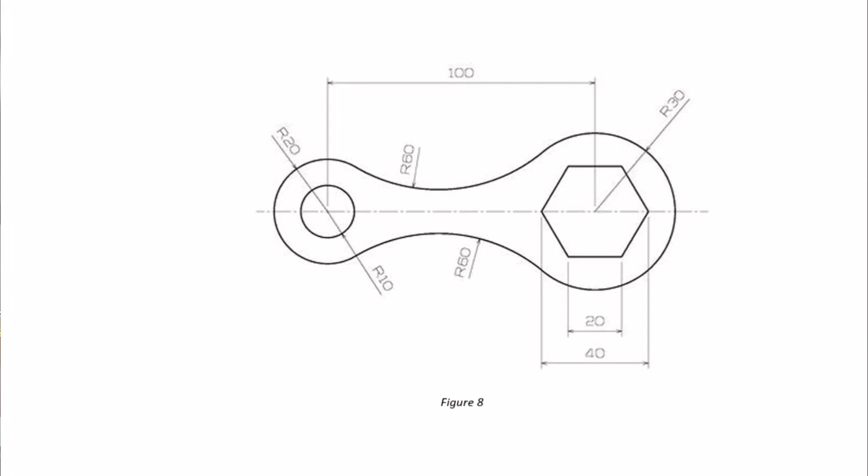Hello guys. So since we have done all the geometric constructions that we said we're going to focus on, well, that will be necessary for our test, I want us to do a couple of exercises, right? With this one being the first one, figure number 8. I chose this one because I can see it's the easiest one to start with.

So to start, I said the first thing that you're supposed to do when you have circles, you're supposed to draw the skeleton, right? I call it the skeleton, but you can call it center lines. Just draw the horizontal one. And then they are saying these two center lines are going to be 100 millimeters away from each other. So you measure 100 there, like that.

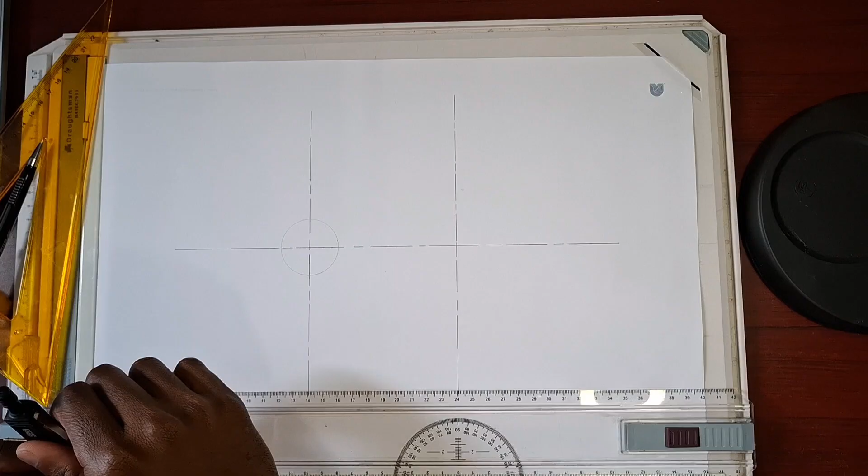Then now I'm going to draw my circles there. The first circle is 20 millimeters radius, the smaller one, right there. I'm just gonna draw it in faint lines, just make a hole there. And then the bigger one is R30, 30 millimeters, like this, also in faint lines. I draw it in faint lines because there is some material there that I'm supposed to erase, because we still need to get those other tangent arcs.

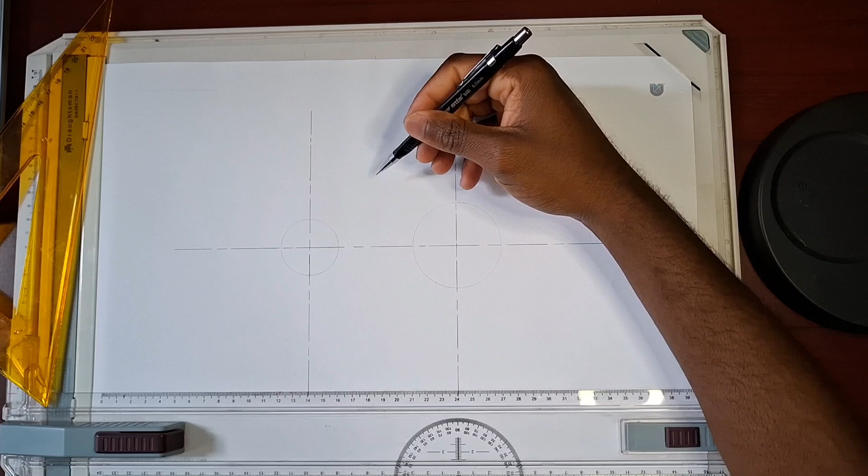As you can see on the question, there are two tangent arcs to those two circles. So we said you are going to use method number 7 on your notes, the first document I gave you, the blue one, to connect those two circles. The goal here should be to locate the center of the arc that is supposed to touch these two circles. If you don't know the position of the center, you have to use a compass to locate it, not a ruler.

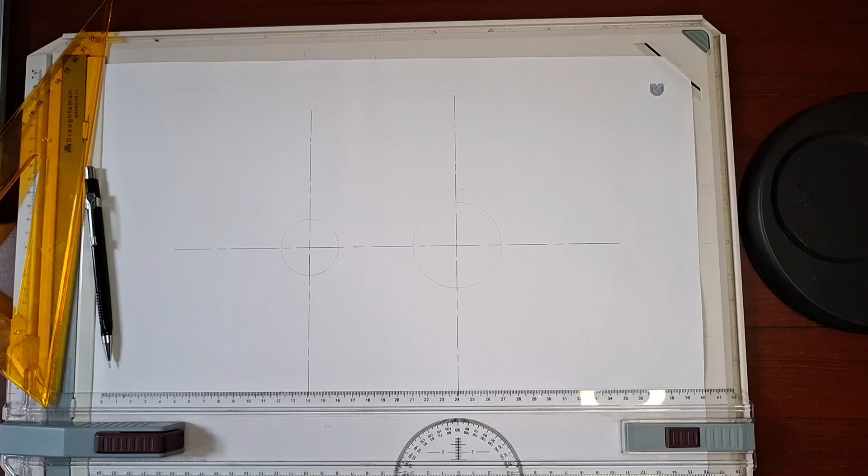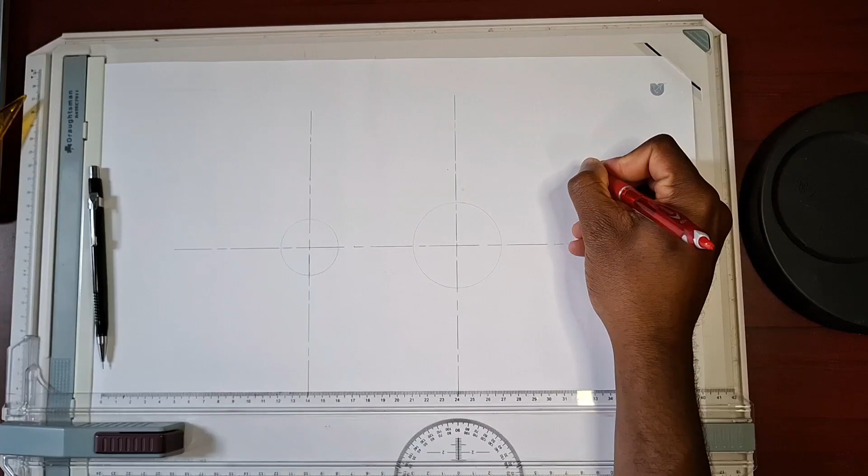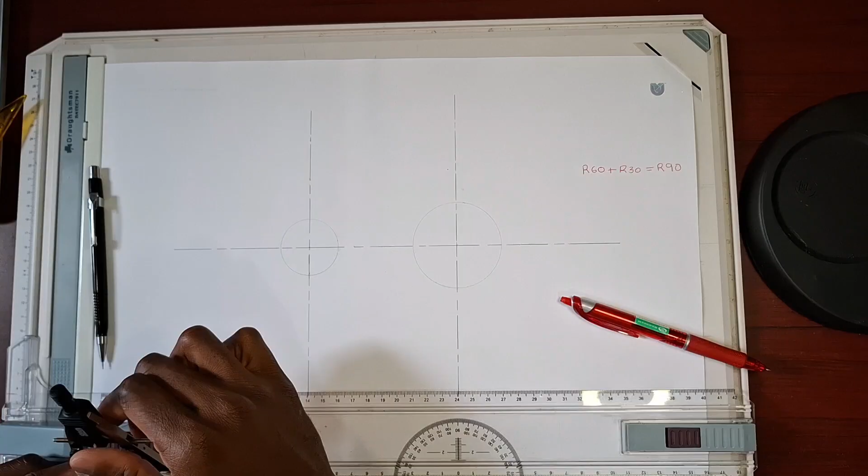Now they say the arc that is supposed to touch those two circles is 60 millimeters in radius. If you do not know the position of the center, you use a compass, not a ruler. Let's focus on this circle first. Since the radius joining these two is 60, you say R60 plus the radius of this one, which is R30. This gives you R90. So you open 90 on your compass, like that. You take it circle by circle.

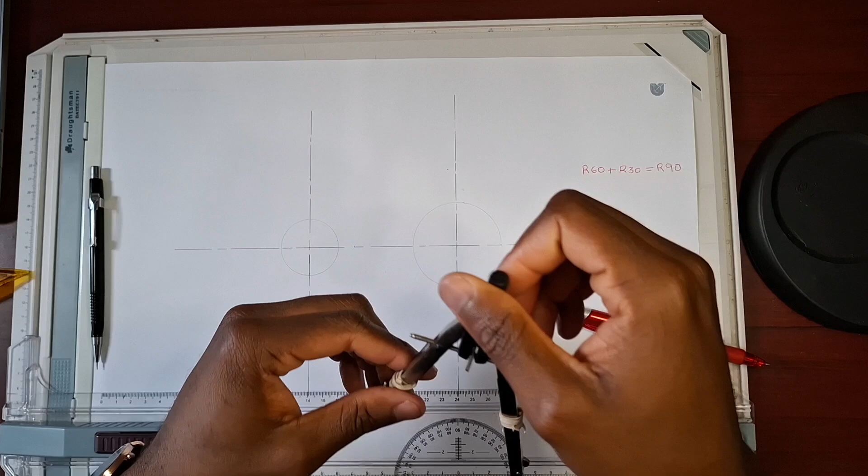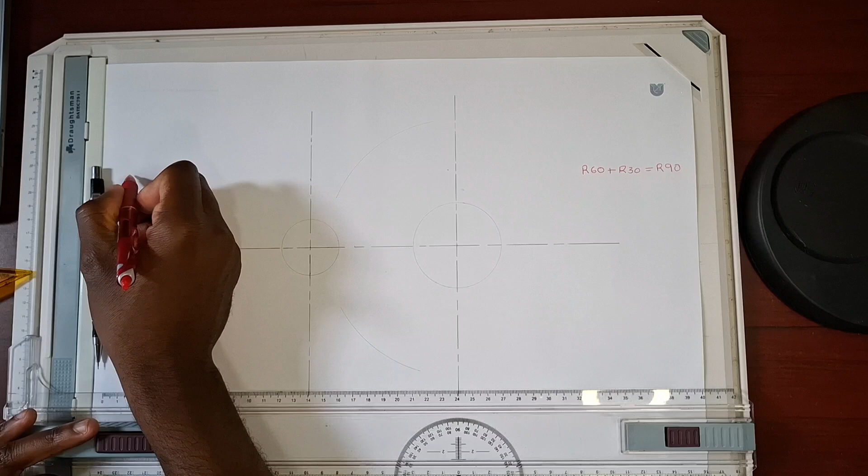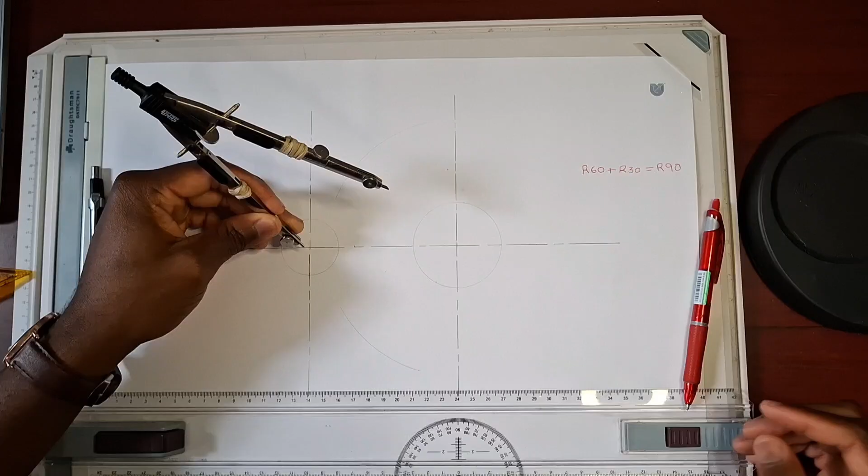Now you place it right there and make an arc. Since the arc touching here is the same one touching this side, both 60 according to the question, you can also make that arc this way. Now you go to the other circle: R60 plus the radius of this one, R20, gives you R80. Open 80 on your compass, place it right there and make an arc. Now this is the position of the center of those two arcs.

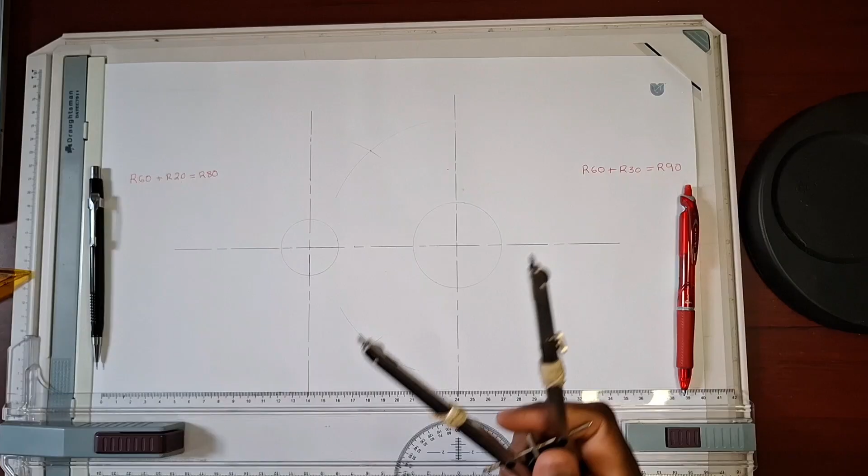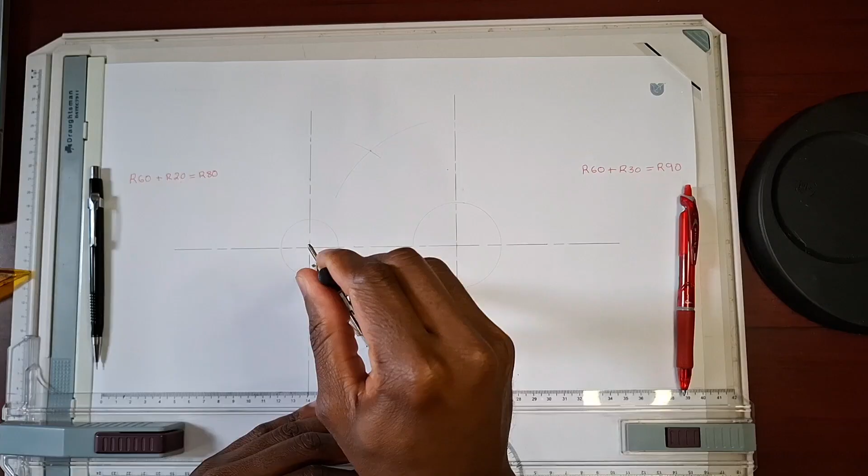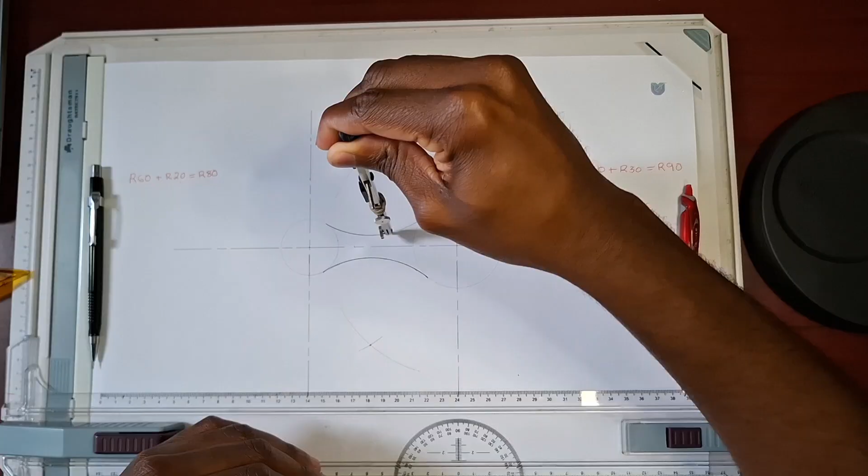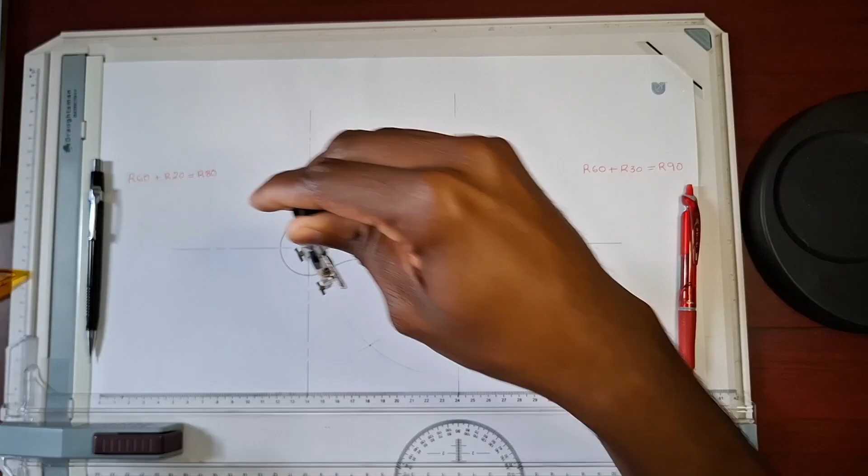Now that you have the position, you can open 60 on your compass, because the radius is 60. Place it right there and draw that arc, like that. Take it to the other side. Now you can darken this one, because you can see where the tangents are. Now darken the other ones. Go to the other one. You draw until the tangent; you don't have to pass.

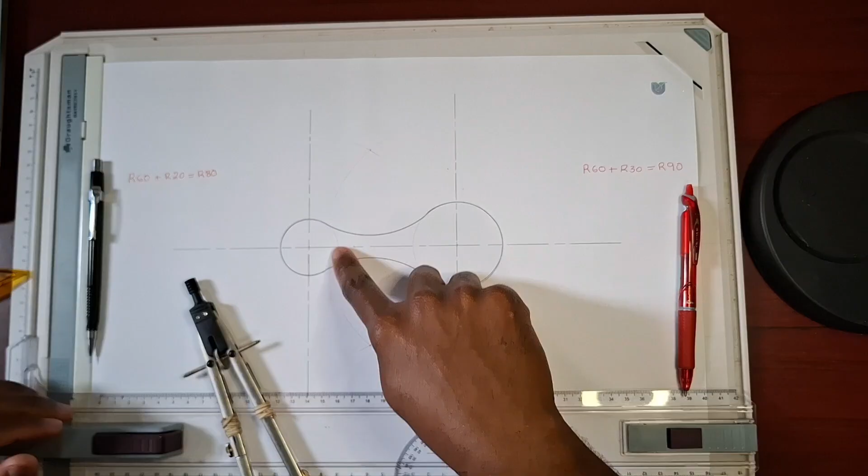Oh, my compass is not stable enough, but yeah, that's it. These construction lines you can choose to erase, or just leave them, as long as they are not visible or dark lines. Now there is a circle right there; they said its radius is 10. So you open 10 on your compass. Sorry, my compass is a bit unstable. Okay, something like that.

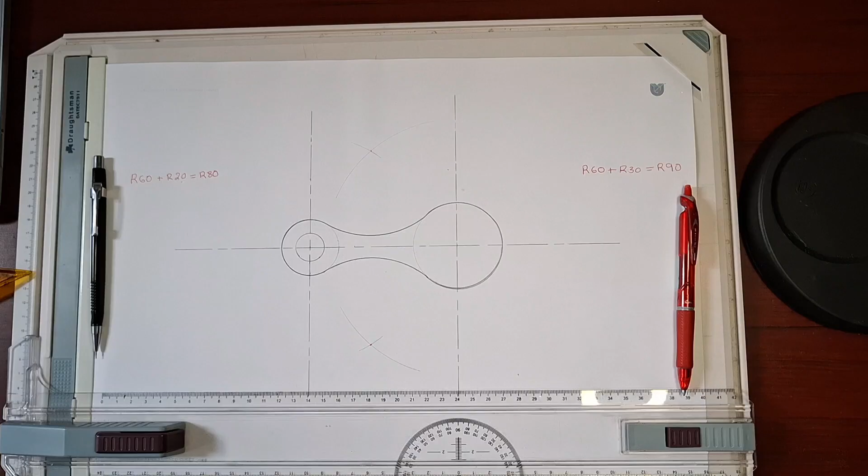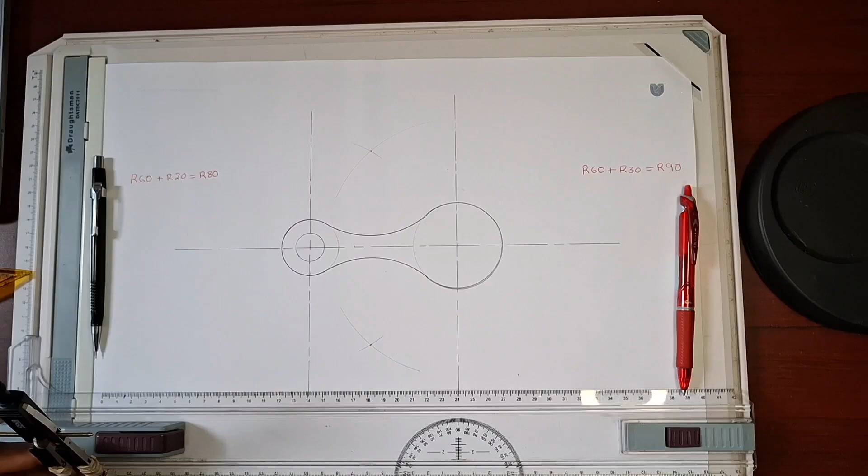And then on this side there is a hexagon, one side of which is 20 millimeters. What do we know about the hexagon? The length of one side is equal to the radius of the circumscribing circle for that hexagon. So on your compass, you open 20 millimeters, place it there, and draw a faint line circle like that.

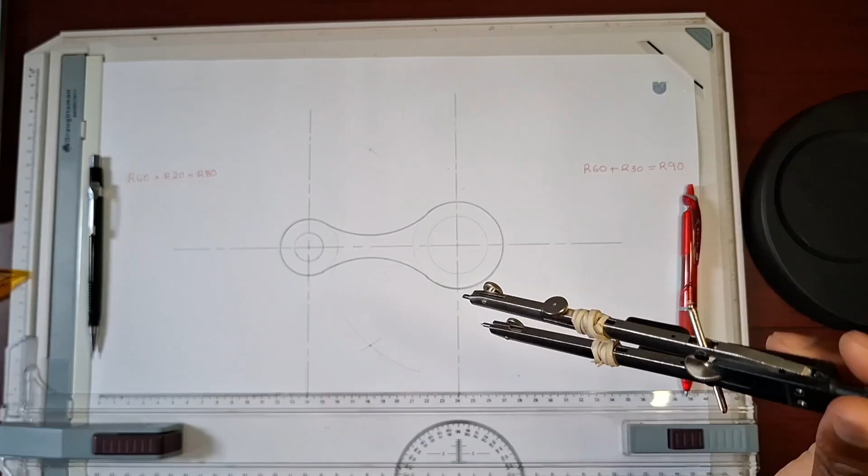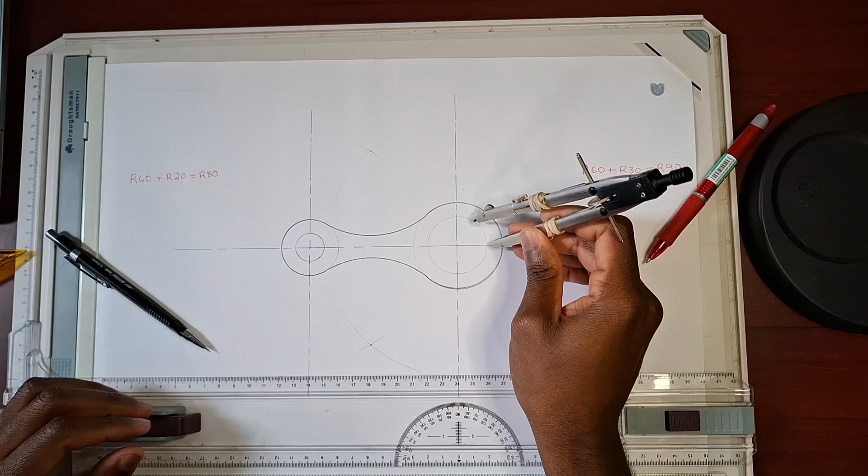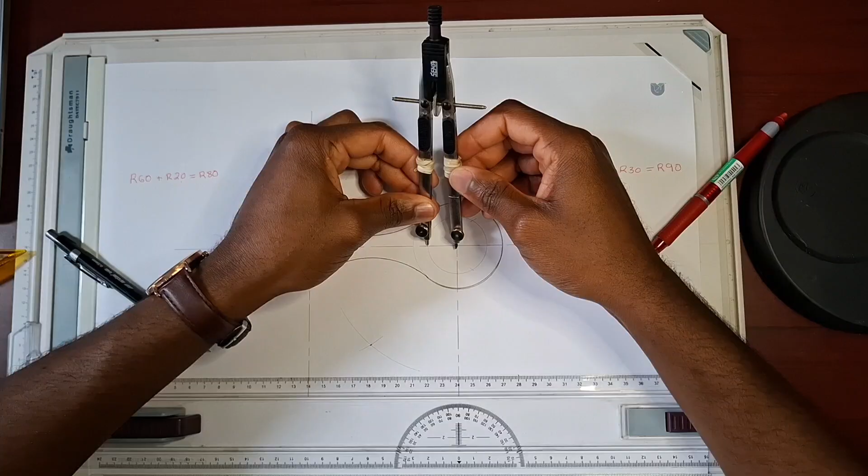Then you take the very same 20. Let me just connect my center lines to intersect, like that. Take the same 20 millimeters; it might have moved, let me verify. Place your compass on that intersection, make an arc, and make an arc on the other side. Do the same on this side. There are many methods to draw a hexagon; I'm not really pressed about that. Use any method you're comfortable with.